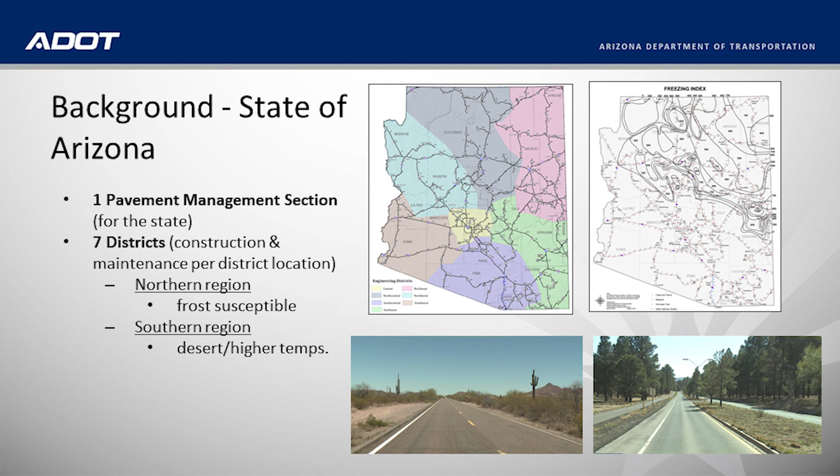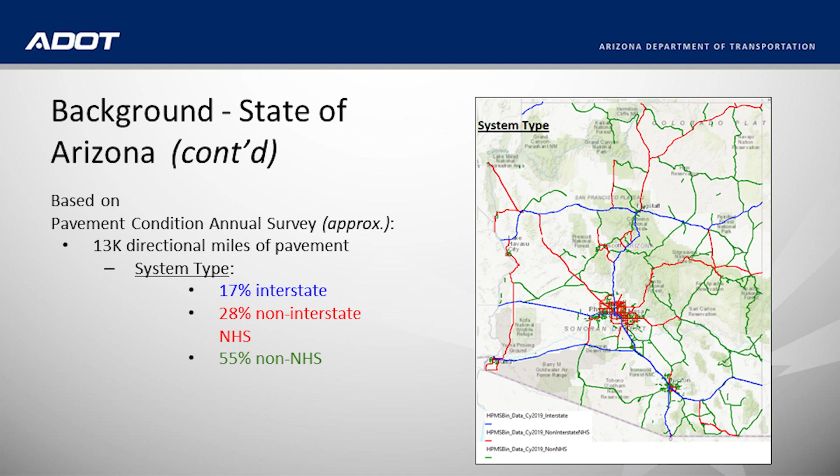Every year, we have our pavement condition survey, out of which we collect about 13,000 miles in each direction. I couldn't figure out how many lane miles that is, but that's how much we collect per direction, out of which about 17% is interstate, 28% is non-interstate NHS, and about 55% is non-NHS.

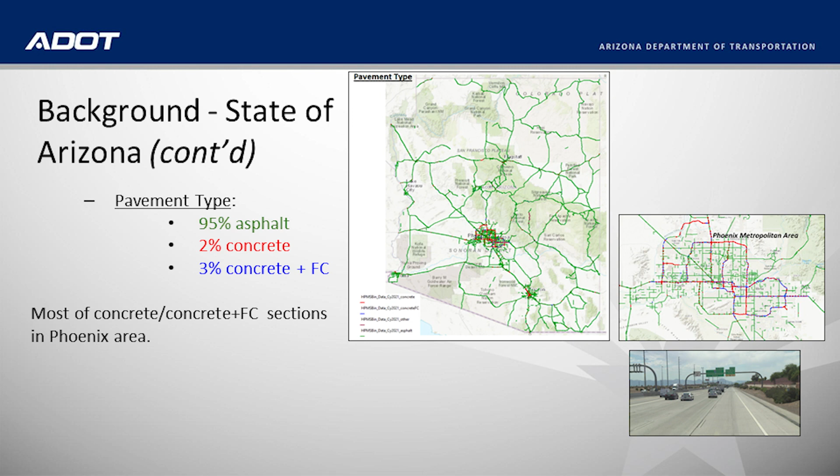Out of this condition survey, the majority of the pavement, 95%, is asphalt in Arizona, and we've got a little bit of concrete, 2%, and 3% of concrete with a little friction course layer on top. And those concrete areas are concentrated mainly in our major city, the Phoenix area.

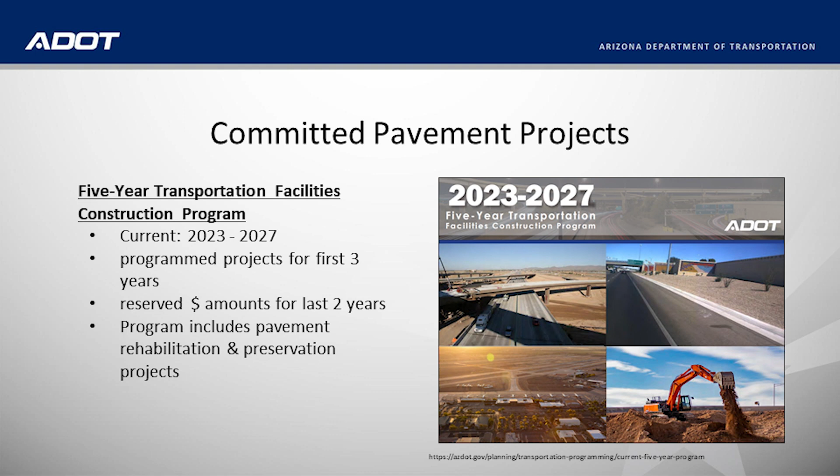When we commit our projects, we are committing them in a 5-year transportation facilities construction program. Our current program is out at years 2023 to 2027. We program projects for the first 3 years, and then the last 2 years we just have some reserved amounts. It's too early to actually commit any projects at that time. We are committing projects for pavement rehabilitation and preservation in that same 5-year program.

When we fund these pavement preservation projects, we have our major pavement preservation program, out of which there are 2 sub-programs: the heavier rehabilitation, that is sub-program 111, and then our minor, lighter surface treatments, that is sub-program 112. For rehabilitation, we are working with 95 to 170 million per year. That is going to produce 15 to 35 projects, and then our lighter surface treatments preservation program is 16 million per year. That is about 10 to 15 projects.

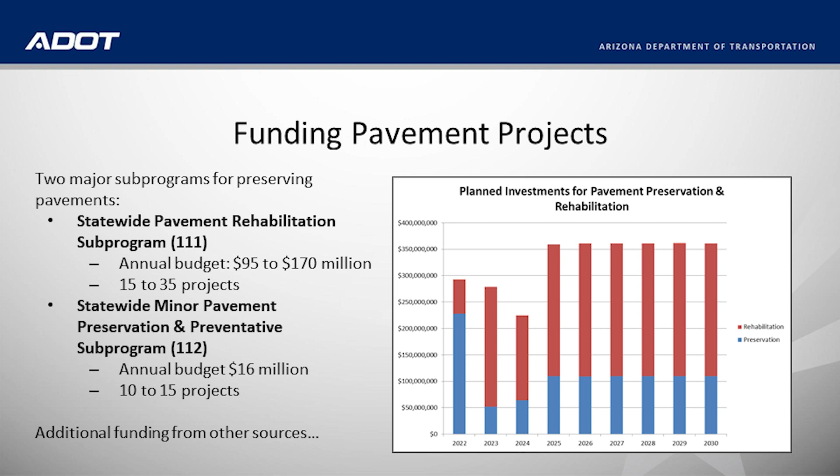And then you might be looking at this chart and saying, oh, that doesn't really add up. That's because we have funding from other sources. In recent years, the Arizona State Legislature designated 36.1 million just for preservation projects alone, so we get that extra money every year. That is called our SLI, State Line Item Program.

And then for FY22, that's what this chart is showing, all the funding that we had for that year. We had some funding from the state for the life extension program, which I will be presenting later in this conference. That was just approved by the FHWA. And then we also had some COVID relief funds, coronavirus response and relief funds, last year, FY22.

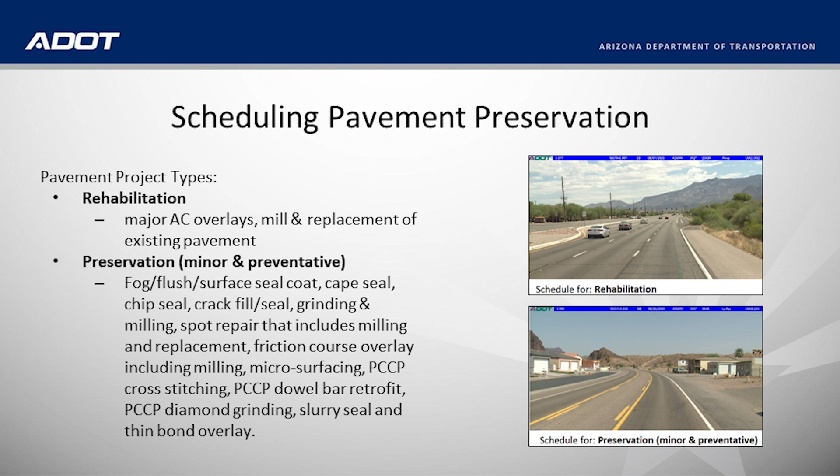That is going to include our fog seals, cape seal, chip seal, crack seal, grinding millings, spot repairs, friction course overlays including the milling, and microsurfacing. And then on concrete, it is cross-stitching, dowel bar retrofits, diamond grinding, and then we also have slurry seal and thin bond overlay within this preservation work type.

We have other preservation for the state line item. We have the larger surface seal and the crack fill projects. This program is maintained by our state maintenance engineer, and we have to collaborate with our district offices to get these treatments out. And then our new life extension program is what is filling the gap between the lighter treatments and the heavier rehab treatments.

These are the treatments that are in between that severity level of distresses. And these are going to be the cape seals and thin bonded overlays we're working with. And when you're thinking about categorizing all of these types of work types, it can get a little bit confusing.

People tend to overlap them with different categories, and so we do have to work with the districts to communicate better on these preservation treatments, how we're naming them, and when we're doing them, because you've got multiple people that are trying to plan similar treatments on the same section of road. And so there's some continuous improvement there.

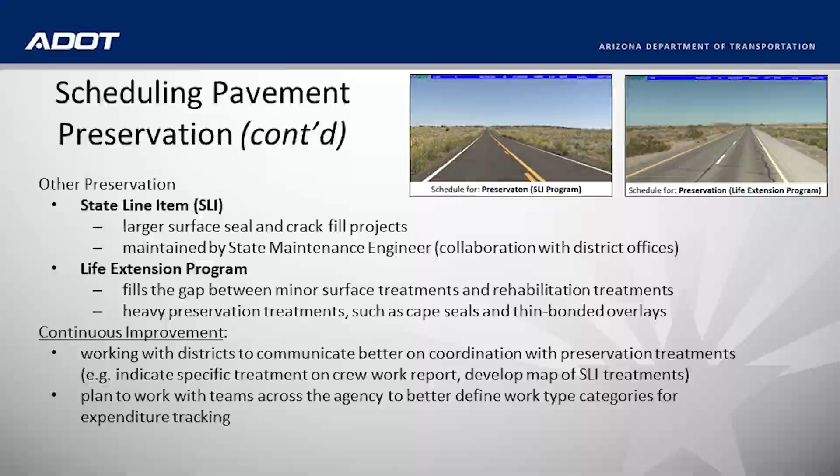And especially for the expenditure tracking, I did help work on the consistency report this year, and that was a little confusing because people were calling it preservation when it should have been rehab and things like that. I'm sure the other agencies have that issue as well.

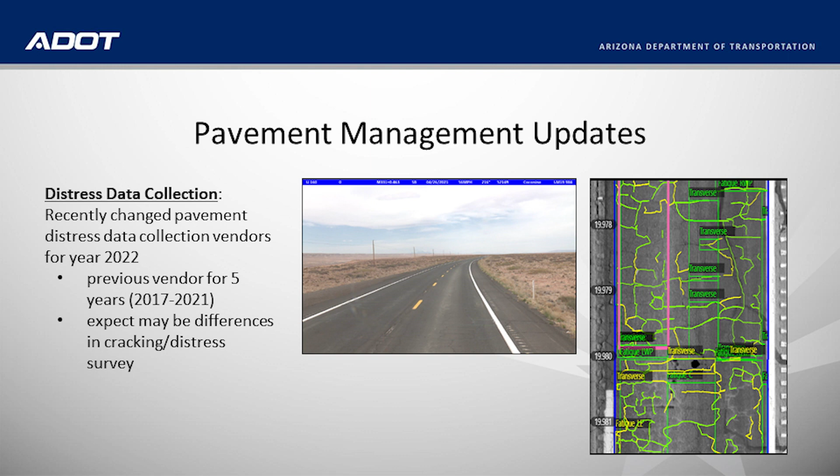Our pavement management system, we've got some deterioration models that we're planning to update in FY23. We've got a lot of data that has come in since we last updated that, plus the new vendor now collecting the data. And then also our decision tree, the treatments in there, we're going to be working on updating those. We haven't updated them yet because it involves updating those trigger expressions, and then there's some other items within the program that are interconnected with that we got to make sure we update.

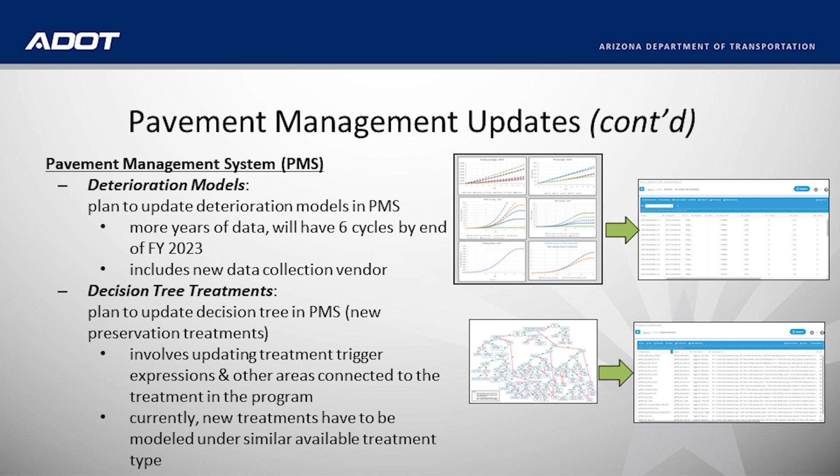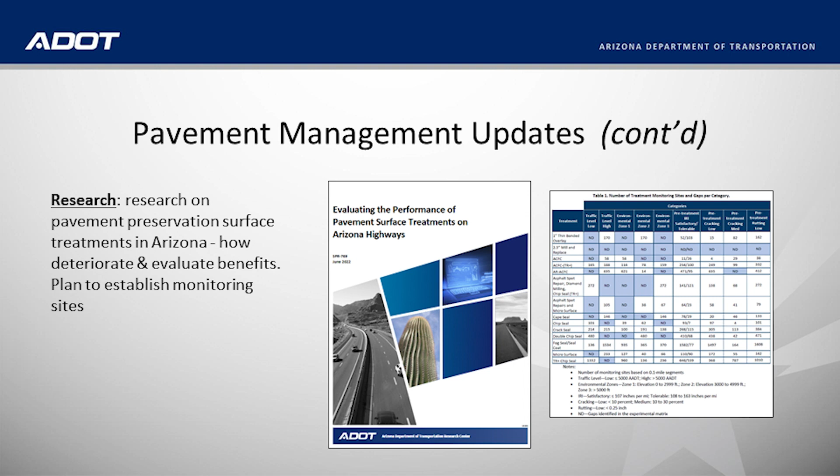And I just wanted to end the presentation by talking about extreme weather, because that seems to be a topic that everybody likes to talk about right now, and that word resilience is popular right now. And so you don't think of really much extreme weather in Arizona, but we do get it. We get repeated heavy storm events, erosion, slope failures, landslides.

With that storm, we get some high water levels and storm water runoffs, and we do have some resilience projects for repairing the pavement that resulted from these extreme weather events, drainage improvements, slope stabilization, and trying to mitigate those rocks from falling down. We also have been seeing higher temperatures and drier summers, and so that's resulting in all these wildfires. And so whenever you have a wildfire, then you have that resulting burn scar that you don't have vegetation there anymore, and so we get this flooding when it rains there, and so roads are getting washed out. We have to worry about those sorts of things in Arizona.

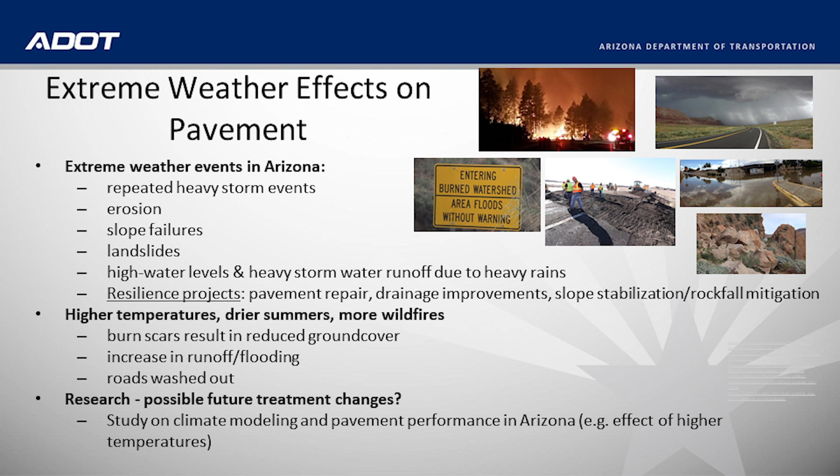And so thinking about all this extreme weather, you had to think about, well, what about the treatment? That's what this conference is about, the preservation treatments. So maybe we have to think about what future treatments are going to have to change. And so there is a study that is starting up where they're looking at climate modeling and the performance of the pavement in Arizona, for example, the effect of higher temperatures. And then I just wanted to end by showing some pictures of different pavements throughout the state of Arizona.